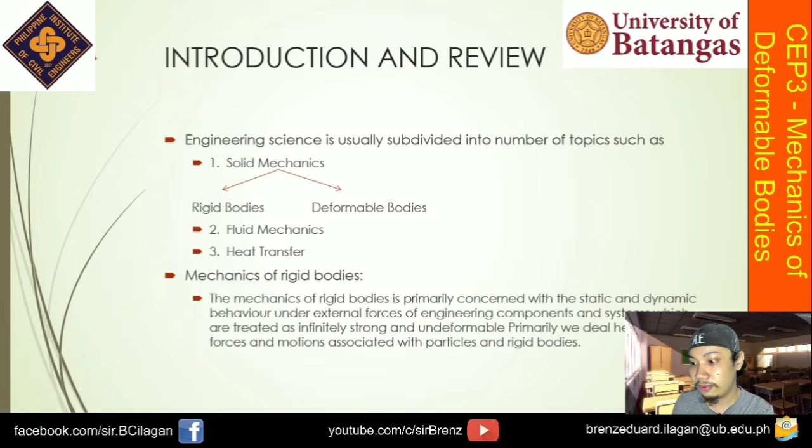So next slide. So we have the mechanics of deformable solids. So ito na yung subject natin, okay? So the mechanics of deformable solids is more concerned with the internal forces and associated changes in the geometry of the components involved. Of particular importance are the properties of the materials used, the strength which will determine whether the components fail by breaking in service, and the stiffness which will determine whether the amount of deformation they suffer is acceptable. Therefore, the subject of mechanics of materials or strength of materials is central to the whole activity of engineering design.

Usually, the objective in analysis here will be the determination of the stresses, strains, and deflection produced by the loads. Theoretical analysis and experimental results have equal roles in this field.

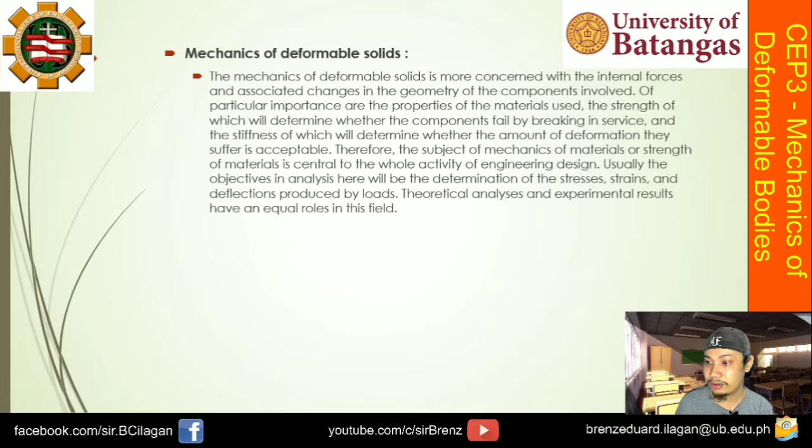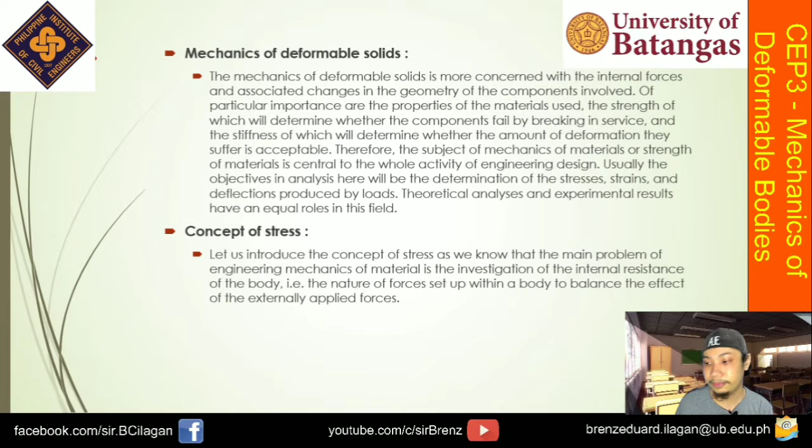Okay, so concept of stress. Let us introduce the concept of stress, as we know that the main problem of engineering mechanics of materials is the investigation of the internal resistance of the body, the nature of forces set up within a body to balance the effect of the externally applied forces. Okay, so let's proceed with the next slide.

Okay, so the externally applied forces are termed as loads. So your external force, another name for it, is loads.

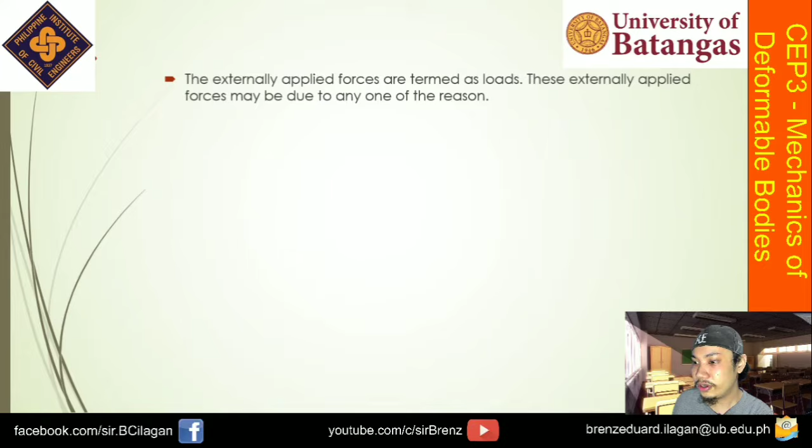So these externally applied forces may be due to any of the following reasons. First, we have due to the service condition.

So in our diagram, we have a cantilever beam. When we say cantilever, one end is fixed and the other is free. Here, we have an externally applied load P at the rightmost end, and somewhere here, at this point, we have another load P.

So somewhere here, at point K, we made an exploratory section. When we say exploratory section, we cut the cantilever beam into two. So here in figure B, it shows the internal forces that will act on our cantilever beam based on the external load P applied.

So with the load P applied on our cantilever beam, because of that, we get internal forces. Again, as mentioned before, the internal force is our main concern, and from that internal force comes the effect on our object.

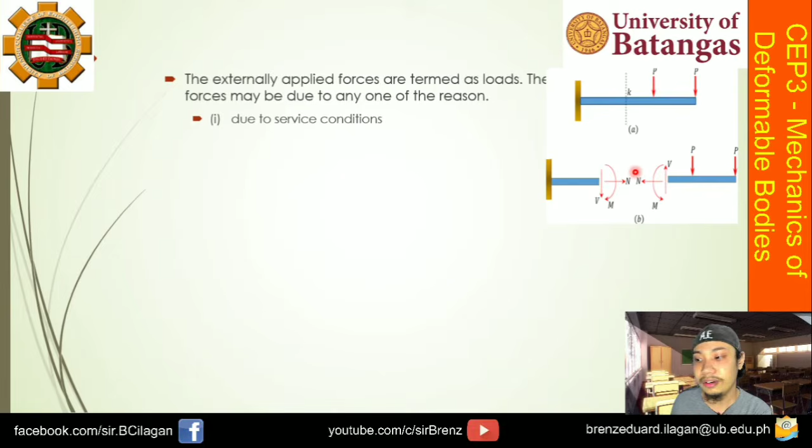So we have internal forces: shearing force, normal force, and moment. Later on, we'll learn what these shearing force, normal force, and moment are for, and where we'll use them in the mechanics of deformable bodies. We'll discuss this little by little, so relax.

Next, due to the environment in which the component works. So as you can see, we have a house. This is our object, which is affected by wind pressure.

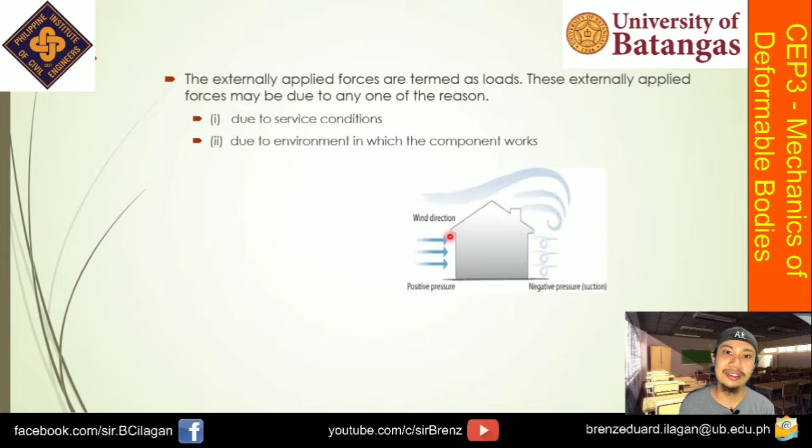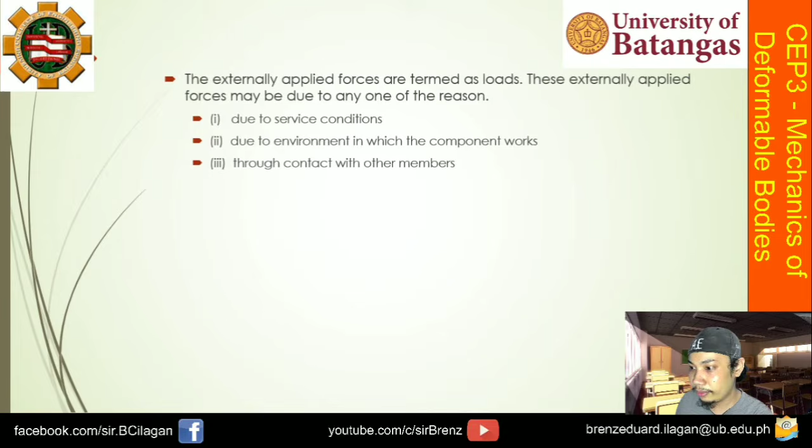Next, the third one will be through contact with other members. So we have here skater 1 and skater 2. I think they're a couple, and skater 1 caught skater 2 looking at someone else. Because of that, skater 1 pushed skater 2.

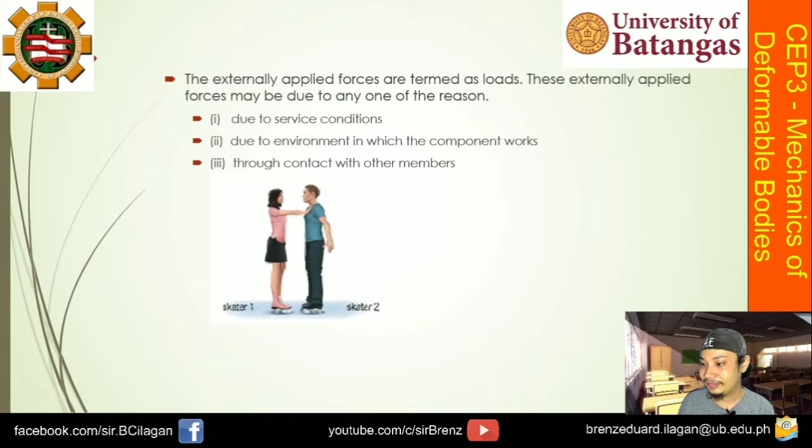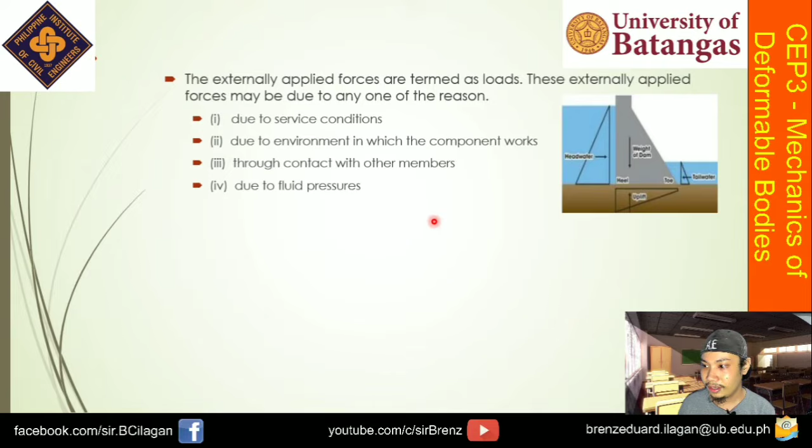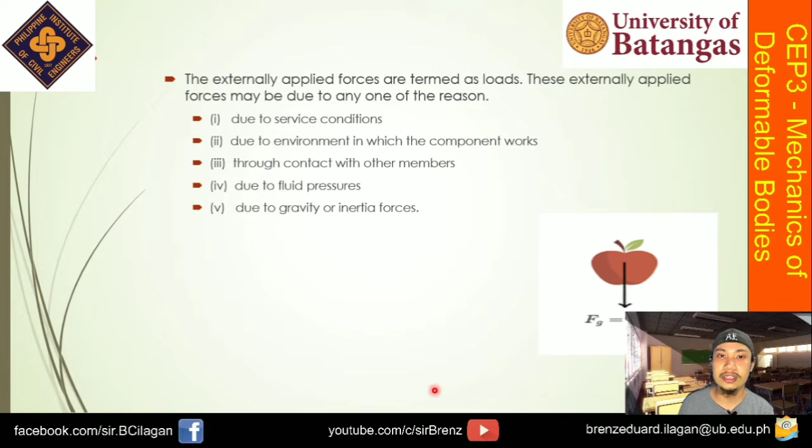So as we know, in mechanics of deformable solids, externally applied forces act on a body and the body suffers deformation. From an equilibrium point of view, this action should be opposed or reacted by internal forces, which are set up within the particles of material due to cohesion.

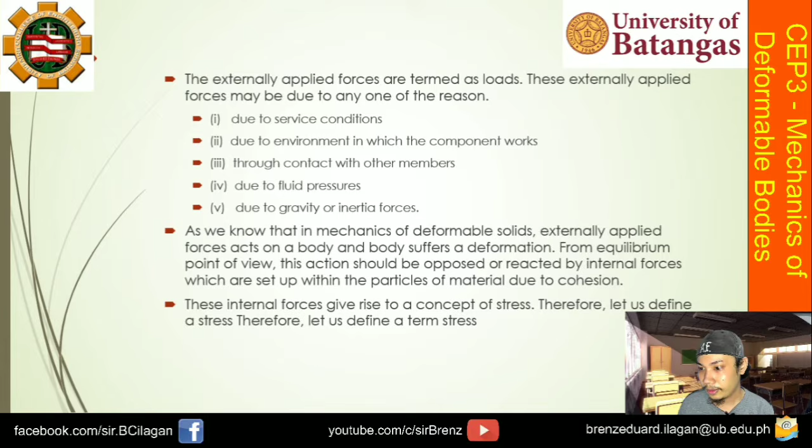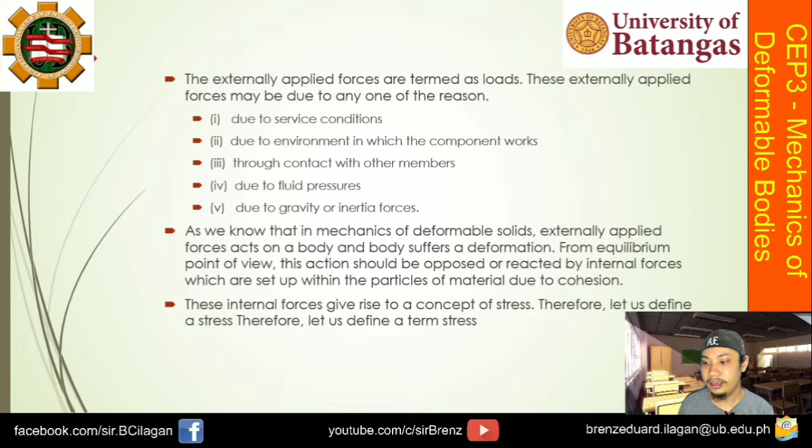So these internal forces give rise to a concept of stress. Therefore, let us define stress. So next slide, let's define what is stress. Don't you be stressed.

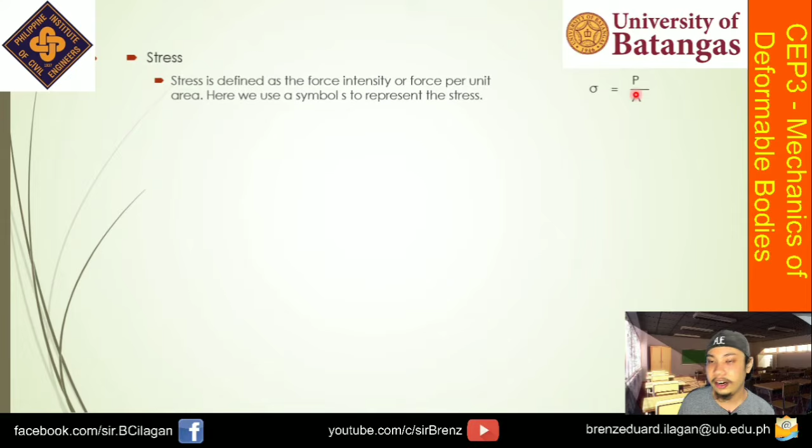Stress is defined as the force intensity or force per unit area. We use the symbol S to represent stress, but here we symbolize our stress with the Greek symbol sigma, or the letter O. So the stress is just equal to the force per unit area. We have a force P divided by the area, or the cross-sectional area of the object being analyzed.

P is the applied normal load in Newtons and A is the area in square millimeters. This is the normal unit we use in stress, but take note, the units aren't limited to just that. These are just SI units. Aside from Newton, we also have kilonewton, etc. And square millimeter can also be square meter, depending. Aside from that, we have English units like pound, kips, inches, feet. So please review the common units of force and area.

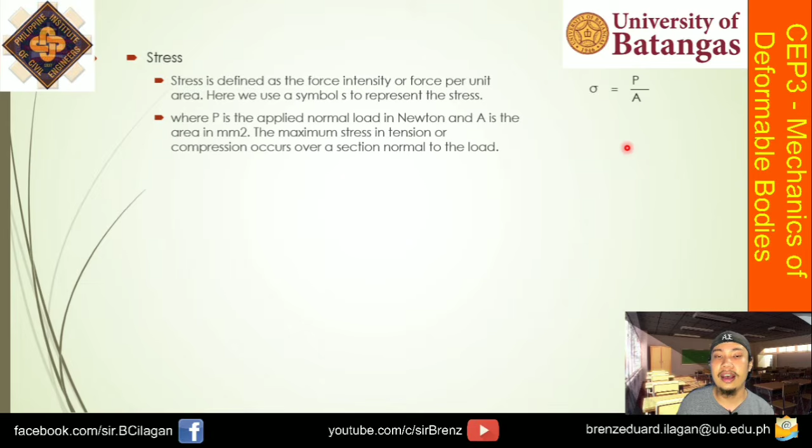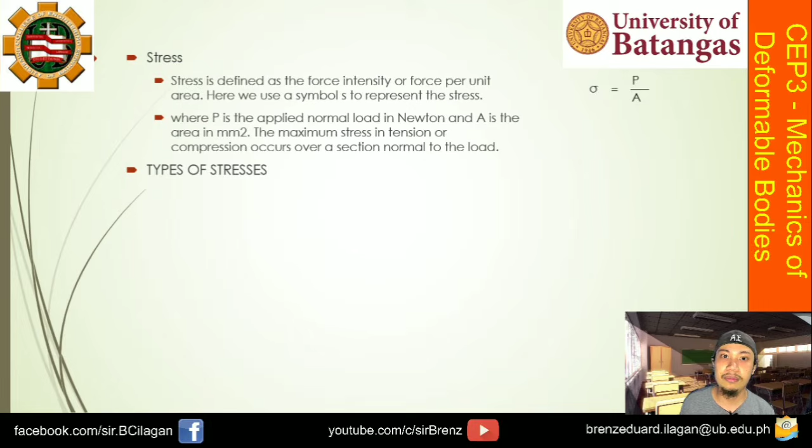So what are the types of stresses? What we'll do is first discuss the first type of stress. The first type of simple stress is the normal stress. We'll go through them one by one, and after the discussion, we'll solve some problems.

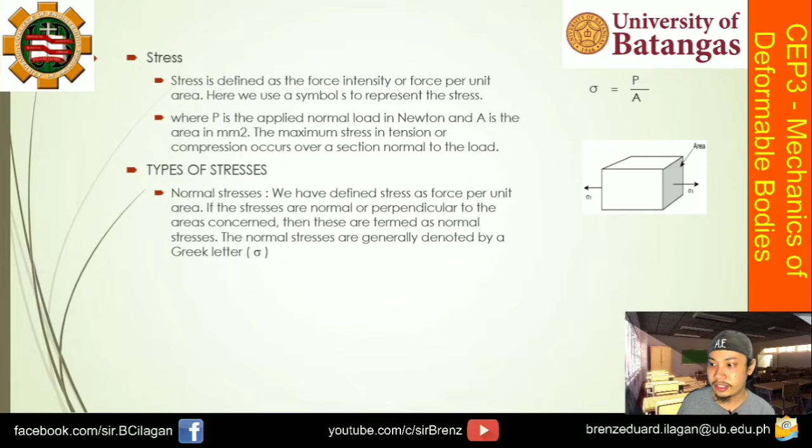So we have the normal stress. When we say normal stress, we defined stress as force per unit area. If the stress is normal or perpendicular to the area concerned, then it's called normal stress. Normal stresses are generally denoted by the Greek letter sigma.

Under normal stress, we also have different classes of normal stress. We have the uniaxial state of stress. In this diagram, this is the uniaxial one. From the term itself, uniaxial means we only consider one axis. For this diagram, the only axis with stress is the x-axis.

Next, we have biaxial and triaxial state of stresses. So we have biaxial and triaxial state of stresses, where either two mutually perpendicular normal stresses act, or three mutually perpendicular normal stresses act, as shown in the figures.

This is an example of biaxial state of stress. Again, by the term itself, biaxial means we consider two axes with produced stress. For this, you have stress denoted by sigma 1 acting at the x-axis and sigma 2 acting along the y-axis. For the triaxial state of stress, we add the z-axis, which has sigma 3, or stress 3.

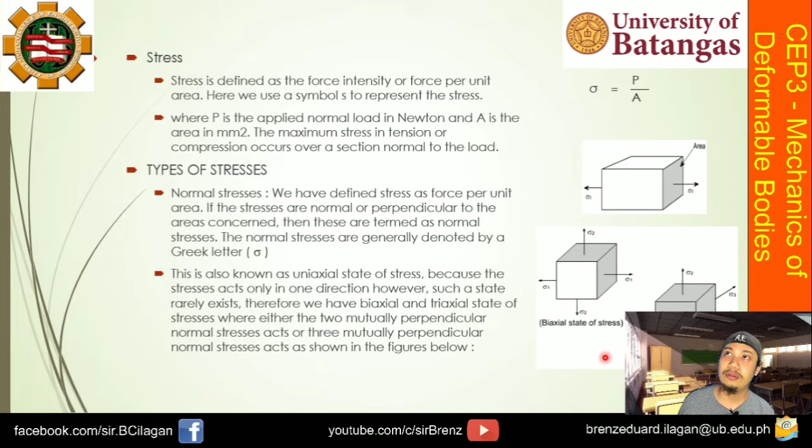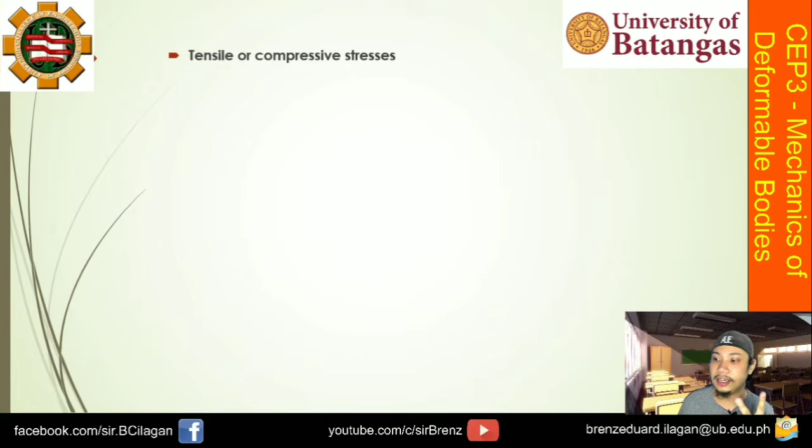So again, as I said earlier, normal stress has two classes. The first one is tensile stress, and the second one is compressive stress. Normal stress can be either tensile or compressive, depending on whether the stress acts out of the area or into the area.

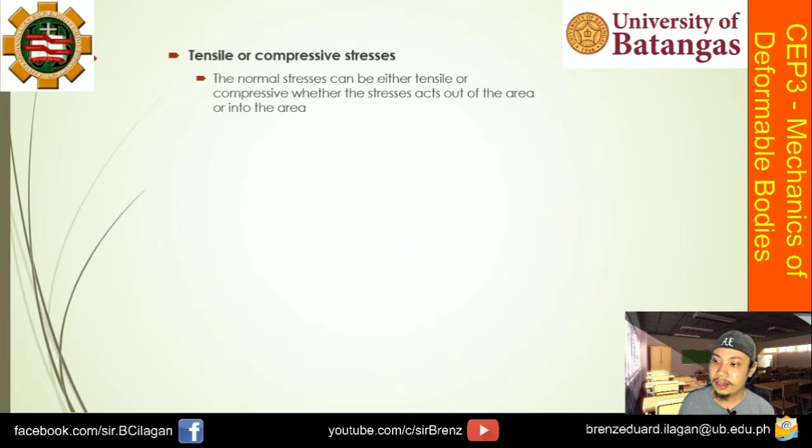Looking at the diagram, when the force acts out of the area, if it's pulling outward, the tendency is to stretch the area or object being analyzed. So it falls under the category of tensile stress - if pulled, it elongates or stretches. Then, when the force goes into the area, or pushes inward, that's under compressive stress. As you can see here, the arrowhead points into the area, so that is considered compressive stress.

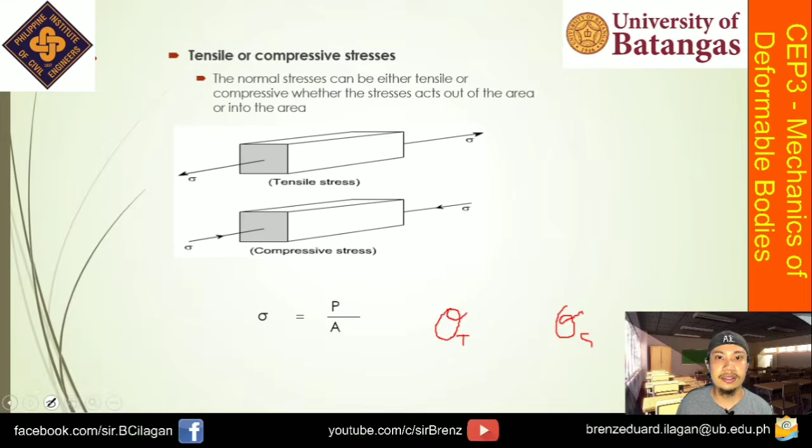Okay guys, let's start our discussion. So in this video, we'll have problem solving for normal stress. So hello guys, this is our first problem for normal stress.

Let's get the pen. So before we solve this problem, don't forget to smile. Smile lang. Okay, so first let's write the given values in the problem.

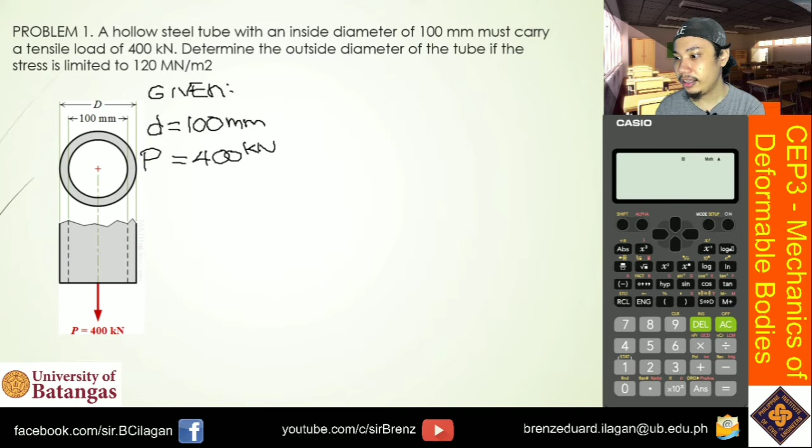Let's start with the inner diameter, denoted as small letter d, that is 100 mm. Next, also given is the applied load of 400 kN. Aside from that, given is our tensile stress, denoted as sigma t, 120 mega-newton per square meter. Guys, this mega-newton per square meter can also be written as 120 megapascal.

So what is required in the problem? We need to find the outer diameter, capital letter D. So for the solution, what will be our working equation? From the discussion earlier, sigma t is just equal to P over A. So guys, it's just direct substitution, right? So the only challenge here is the formula for the area. The area we need is this shaded part.

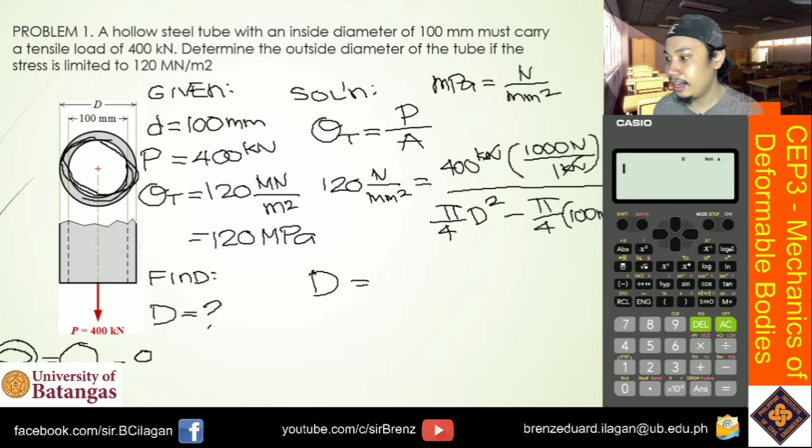With that, let's find the value of D. Let's use our handy dandy calculator. We have 400 times 1,000 divided by 120. Then transpose, so from minus it becomes plus.